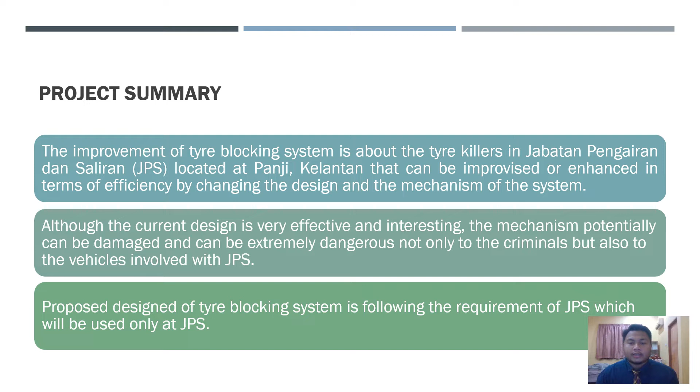Next, although the current design is very effective and interesting, the mechanism potentially can be damaged and can be extremely dangerous not only to criminals but also to the vehicles involved with JPS. And the proposed design of the tire blocking system follows the requirements of JPS, which will be used only at the JPS entrance.

Next slide is the introduction of the tire blocking system. So the tire block or the tire killer is basically a machine or a device that can control one-way traffic. It is commonly used for approaching highly secure places such as banks, military bases, airports, and government offices, because it provides excellent protection against the unlawful entrance or exit of hostile vehicles.

So next, if a vehicle attempts to break through, its tires and/or axles will be damaged. After the vehicle has passed, the teeth return to their position where they will stay in the housing until the switch on button is turned on. And the main purpose of this project is to puncture and break the tires of unauthorized vehicles.

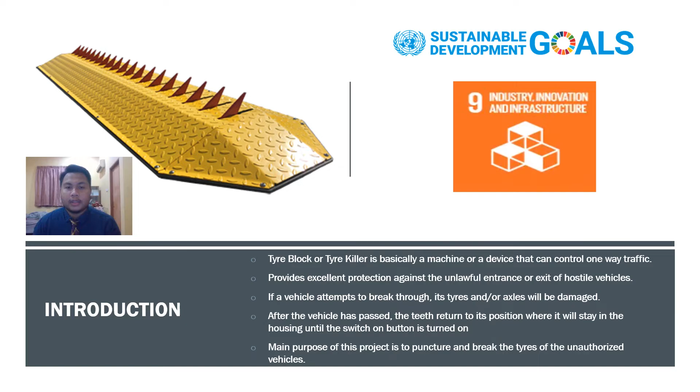Moving to the literature review, in this chapter, based on the research made from a few journals and articles on the website, there are several points related to my final year project. So the first point is the barrier system. According to Jones, Shao and Blass in 2020, they investigated the usage of surface-mounted barrier systems erected atop an existing raised structural slab, which is one unique and widespread variation. Though these barrier types eliminate the requirement for a deep foundation, there is still a strong expectation that the barrier is continually maintained by the earth beneath.

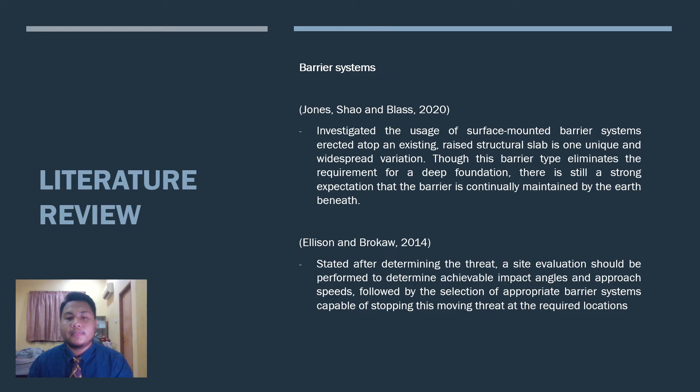Next, according to Ellison and Brokaw in 2014, they stated that after determining the threat, a site evaluation should be performed to determine achievable impact angles and approach speeds, followed by the selection of the appropriate barrier system capable of stopping this moving threat at the required location.

The next point is the forces contact to the vehicles. So according to Sarmah and Tuan in 2011, they discovered that once the vehicle surface collides with a barrier, contact force calculations based on rigid body dynamics are no longer applicable because the vehicle body is made up of numerous closely spaced vertices. More than one vertex may collide with the barrier at the same time.

And the next is from Woodson in 2020, who explored the field expedient non-lethal vehicle arresting barrier (FENVAB), which was constructed without anchoring to absorb the kinetic energy of the aggressor vehicle and convert it to frictional energy by forcing the vehicle to slide once it hits the barrier. Furthermore, this barrier design uses just basic steel components and necessitates little engineering assistance, equipment, or specialist tools.

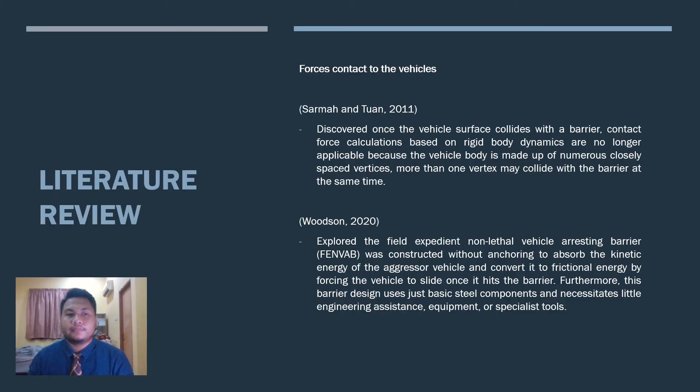So moving on to the problem statement and the objectives of the project. So the first point for the problem statement is about the design of the tire block. In order to improve the security system in the JPS compound, the design must be suitable for the JPS entrance and the types of vehicles that regularly enter the compound. Along with that, the material used must be high in toughness and durability in order to let the vehicle cross over well and safely without breaking the proposed system.

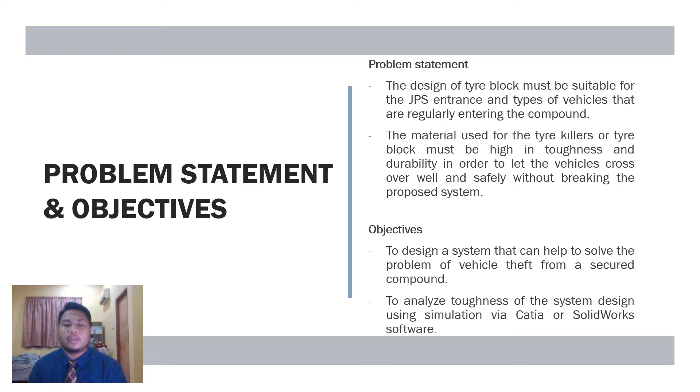And the objectives are to design a system that can help to solve the problem of vehicle theft from a secure compound, and also to analyze the toughness of the system design using simulation via CATIA or SolidWorks software.

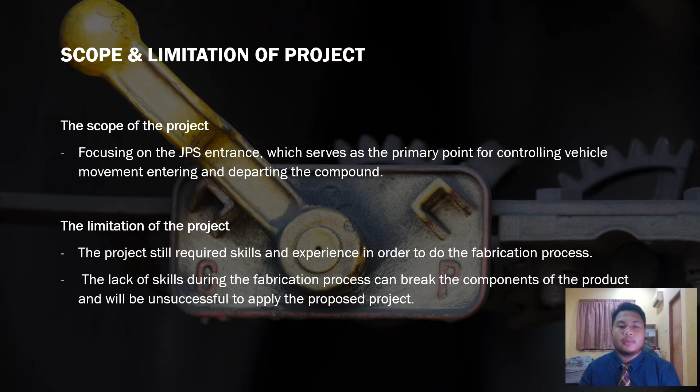Next is the scope and the limitation of the project. So the scope is more focusing on the JPS entrance, which serves as the primary point for controlling vehicle movement entering and departing the compound. As for the limitation, the project still requires skills and experience in order to do the fabrication process. And the lack of skills during the fabrication process can break the components of the product and will be unsuccessful to apply the proposed project.

Next is about the methodology section. For the first point, we will take a look at the construction of the Pugh chart. As you can see, the Pugh chart is about the comparisons between three optional designs, which are hydraulic tire killers as design 1, mechanical tire killers as design 2, and surface mount mechanical tire killers as design 3, and the electromechanical tire killers as the datum of those designs.

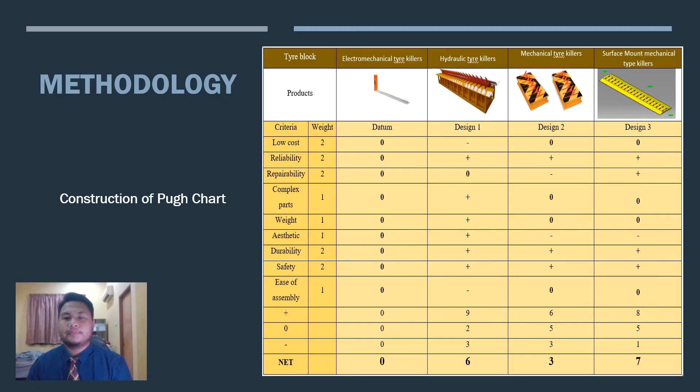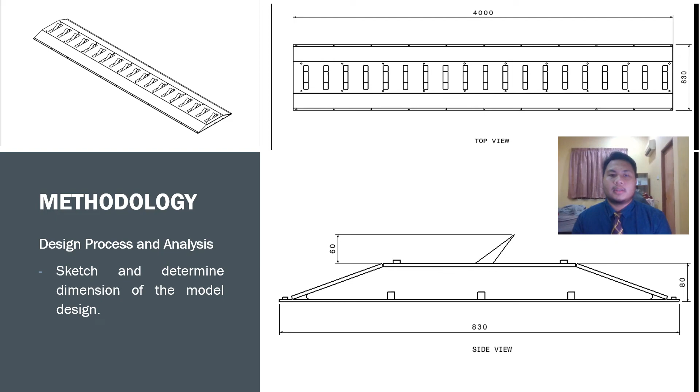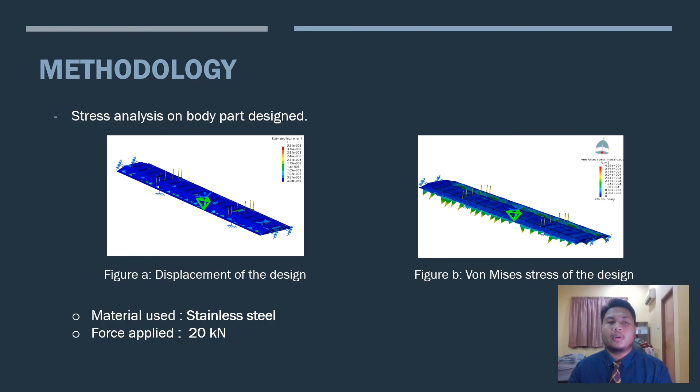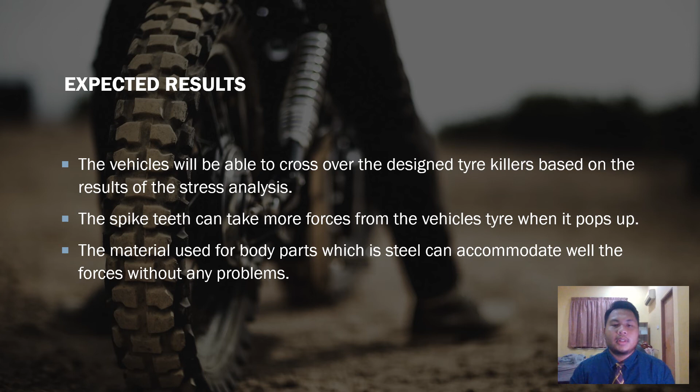So next is the expected results. The vehicles will be able to cross over the designed tire killers based on the results of the stress analysis. So the spike teeth can take more forces from the vehicle's tire when it pops up. And the material used for the body parts, which is steel, can accommodate the forces well without any problems.

And as the conclusion of my project, which is the tire blocking system, the most commonly used design is hydraulic tire killers, because the hydraulic tire killer design has barriers which can block any vehicles from crossing over. Next, the spike teeth must be made with heavy-duty materials in order to increase the security system efficiently.

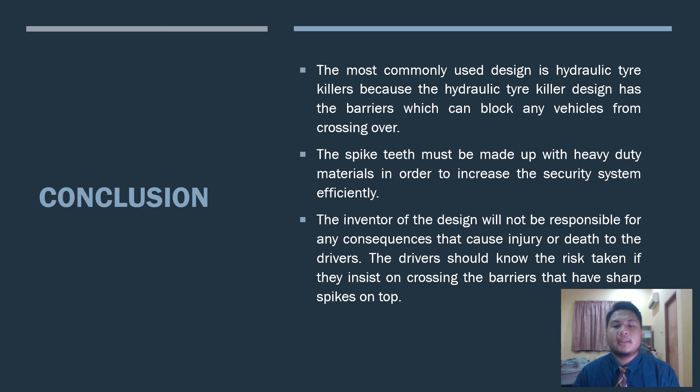And the inventor of the design will not be responsible for any consequences that cause injury or death to the drivers. The drivers should know the risk taken if they insist on crossing the barriers that have sharp spikes on top.